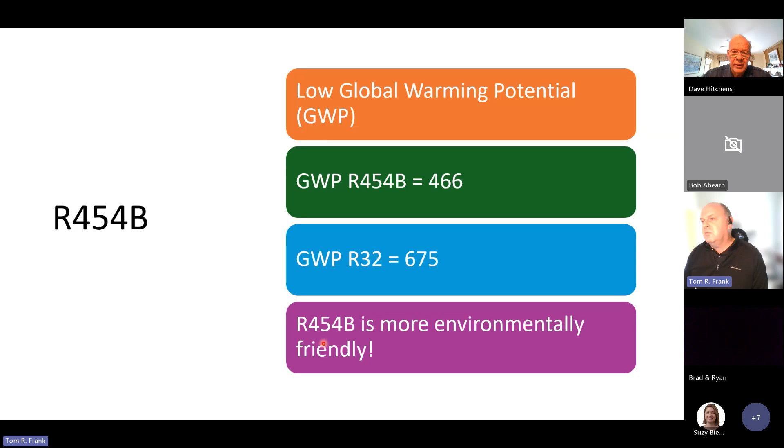Other alternate refrigerants that still conform would be found in most of the ductless manufacturers, like R32, which is 675, kind of squeaking under the radar. So something to think about with 454B is there are a couple different brands, a couple different choices. 454B is more environmentally friendly, with the lower global warming potential.

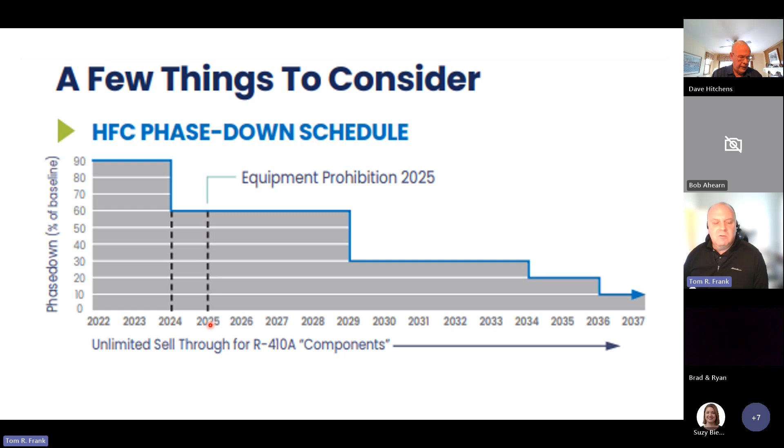This just quickly shows how that phase down works. If you've been through a refrigerant change in the past, I have, you'll know that it's not particularly enjoyable, but we will get through it. This has to do with phase downs over time of the refrigerant itself, when manufacturers can stop or have to stop making equipment, which is really just a few short weeks away. And then there is some sell-through available in the marketplace, which we'll talk about as well.

This slide here is really just talking about that. If you were to think about products available in the marketplace, you could kind of put them into a couple different buckets. There are products, which are finished goods, sealed refrigerant systems from a manufacturer. Those products have a 3-year sell-through.

Systems, which would be various components that get matched together and installed out in the marketplace, have a 1-year sell-through. And then repair components, things that maybe use 410A, may have a longer sell-through if they meet some of the standards put together by our government. And then parts, tools, and testing—you just want to make sure you have the right stuff to work on the equipment using the new refrigerants available today.

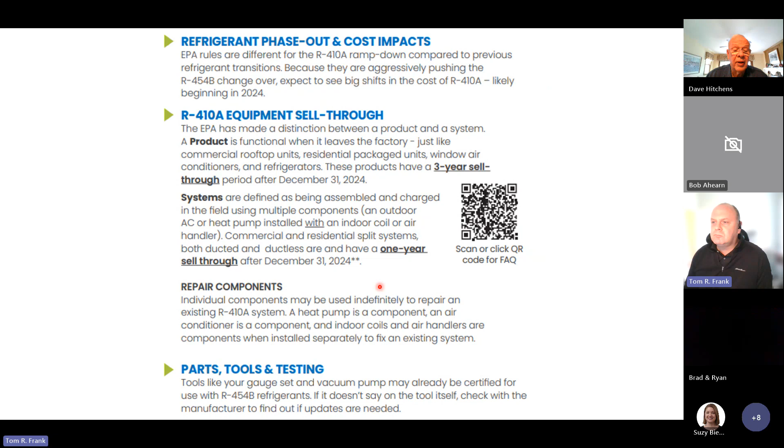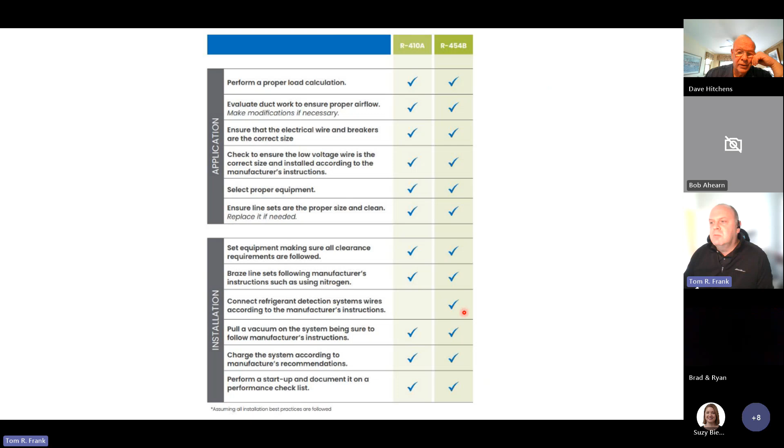This slide here has a bunch of check boxes and different categories. The point of the slide is practices. If you're using good practices today for 410A, really there isn't anything wildly different about 454B, with the exception of this checkbox here, which has to do with refrigerant detection systems that are required on new A2L refrigerants. Everything else really stays the same—you're going to install it the same, select the equipment really the same. Load calculations are important, duct work, charging, everything that you do with the current refrigerant today. There's just a couple other components that are required with the newer refrigerants.

We have a refrigerant detection system control, which is kind of the heart that makes the whole thing work, or the brain. And then we have refrigerant detection sensors.

You can think of these two components when you put them together - they operate kind of like a wet switch. When they detect a particular amount of refrigerant, they will act in a way that shuts down the compressor, runs the fan in the system to dissipate any refrigerant that may be in the airstream until it gets below a particular allowable amount, and then allows the system to work again, unless other sensors within the system say it's not a good idea, like pressure switches.

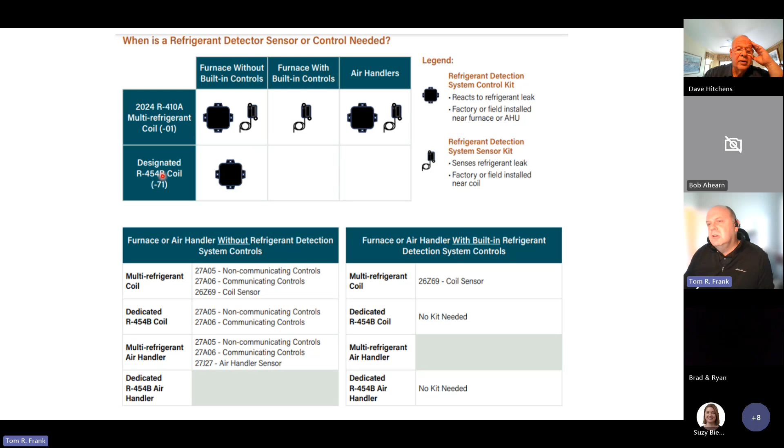So we have sensors, we have controls, and we would also have TXVs. Those are the major components that change as we move into the new A2L refrigerants. You'll see in the nomenclature - we'll get into another slide here - -01, -71. Allied is moving to a bridge system, so some components will be able to be converted to 454B, and others will become dedicated, and we'll talk a little more about that.

Stuff is coming in, stuff we're running out of, and you're neck deep in the middle of it. So if you're hoping that this thing won't happen and will just go away, you will be disappointed, because we're in the midst of it.

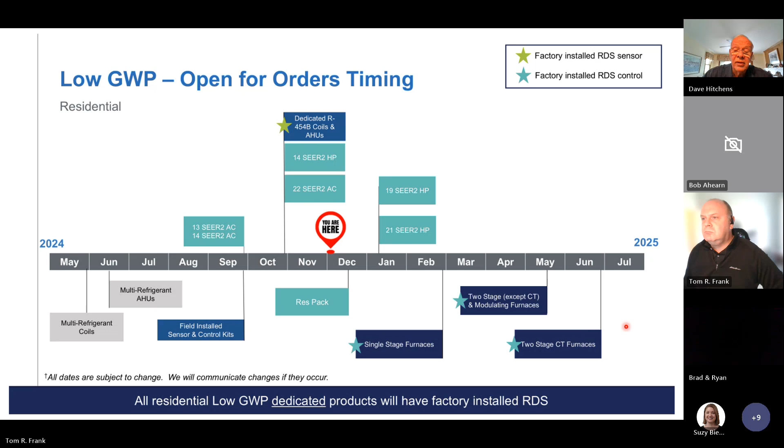We have a tool that we use internally to map out our current inventory of 410A product and what those new products are moving into in the future. I have a roadmap that we'll go over in more detail, but just to let you know, we've developed a lot of our own tools internally to help us keep an eye on what we're running low of, what the replacement is, and whether or not we have enough of it on order.

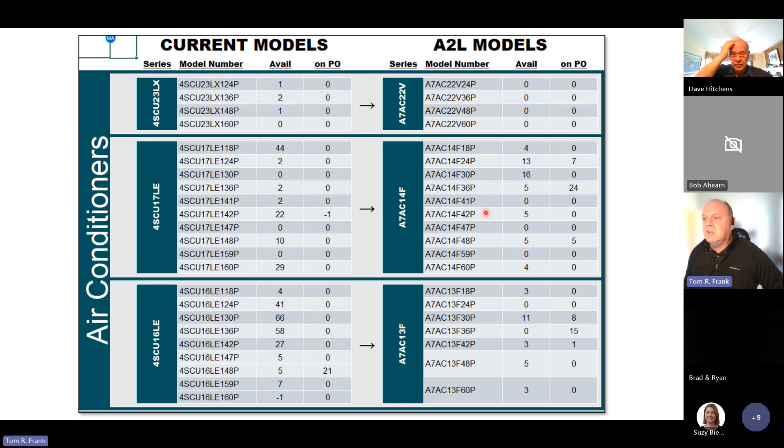We have a really great team of people here at APR Supply. Allied has a great team of people too, but we really have a lot of attention on this subject. It's obviously a very big deal - it's millions of dollars of inventory. We're doing our very best to get it right.

Stocking strategy - we placed our last orders for 410A quite some time ago. The goal, as we were looking at that roadmap and 'You Are Here' map and the timeline, is to plan it so that we have enough of a buffer of product on order to get us past when we think the new stuff is available - roughly about 6 weeks. Allied has been very good about meeting their timeline so far, and it's worked out pretty good.

Flagship brand, AirEase and Armstrong brands - our goal is to move to the 454B as it becomes available. That's how we planned our inventory, not dragging those brands out longer than we necessarily need to.

However, we did choose with Concord, which is the value-driven line, on the entry-level ACs and heat pumps, to hopefully have enough inventory to get us to about June. So if you're someone that really doesn't want to transition until you absolutely have to, know that we have a pretty good amount of inventory of Concord products and matched components that we hope gets us to about the June timeframe.

This transition's a little different because we talked about products, systems and components. That one-year sell-through is not just a ban on us being able to buy and sell it to you, but that's a straight up install ban. So come January 1st of 2026, as an installing contractor, by law you can no longer install 410A systems.

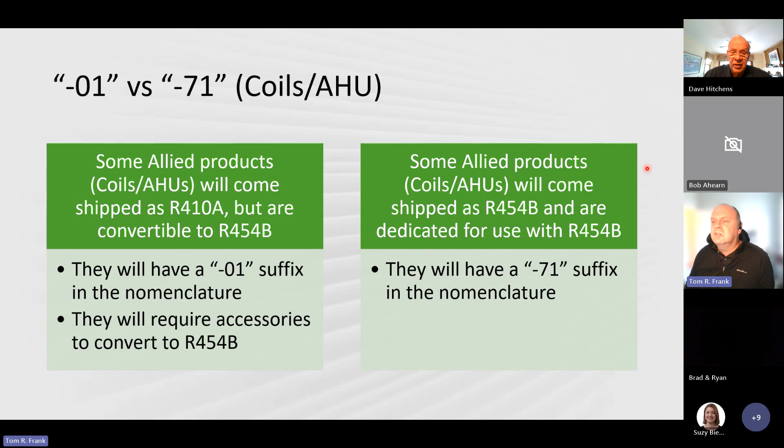Starting with the coil nomenclature here, just so you understand some of the changes to the new products. Starting with coils and air handlers, because the nomenclature is identical between the various brands - the AirEase, Armstrong, Concord all share the same nomenclature for coils. You will see the use of the number 7. That will be our indicator in a lot of the allied products for 454B. Either it's compatible with that, or it is dedicated. In either scenario, the 7 is a good indicator that you're on the right path for a 454B system.

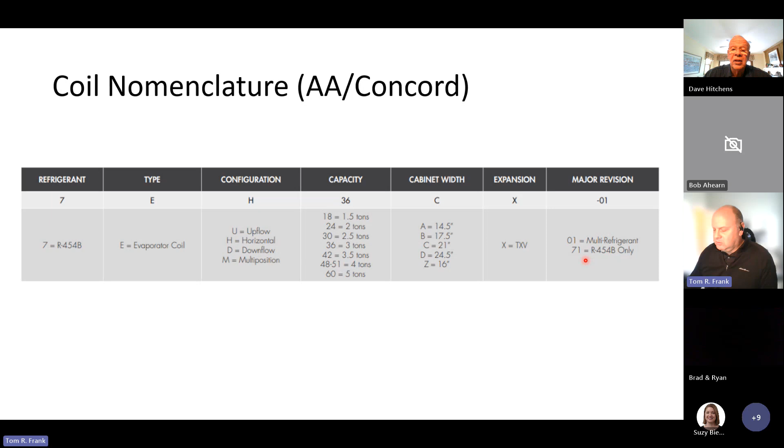7E, that'd be your evaporator coils. Not listed here is C, which would be cased upflow, but there's also upflow coils, horizontal, downflow, and somewhere in the timeline a multi-position is coming back. And then at the tail end, the suffix of 01 and 71, like we just talked about.

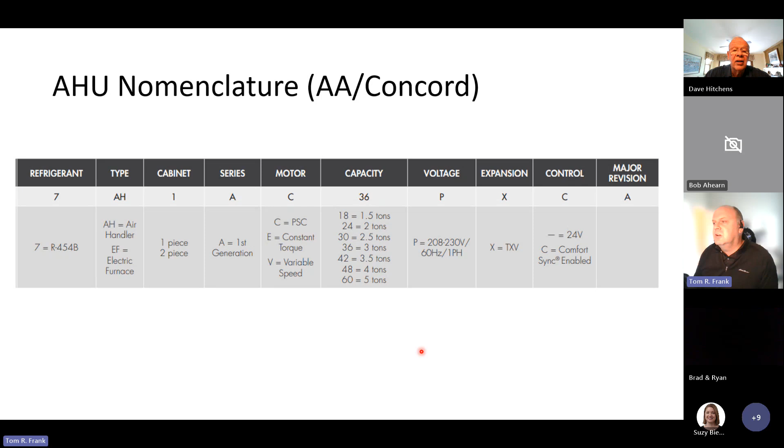Air handler nomenclature, a similar strategy of 7AH. There is an EF, or electric furnace, a modular air handler if you will. Some of the air handlers are single piece, some are 2-piece, so you'll see that in the nomenclature. There will still be options for PSC air handlers, constant torque ECM, as well as variable speed - that remains unchanged. Various tonnages, TXVs, and then somewhere in that suffix you should see either a -01 or a -71, just so you're aware.

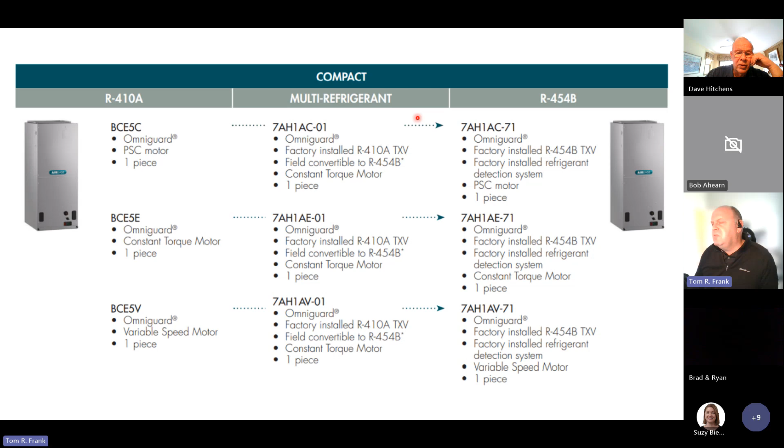Quick roadmap of air handlers. Again, really for the most part, if it existed previously in 410A, that strategy of available products remains unchanged, just with a nomenclature change. Dimensions, even ratings for the most part, are very, very similar.

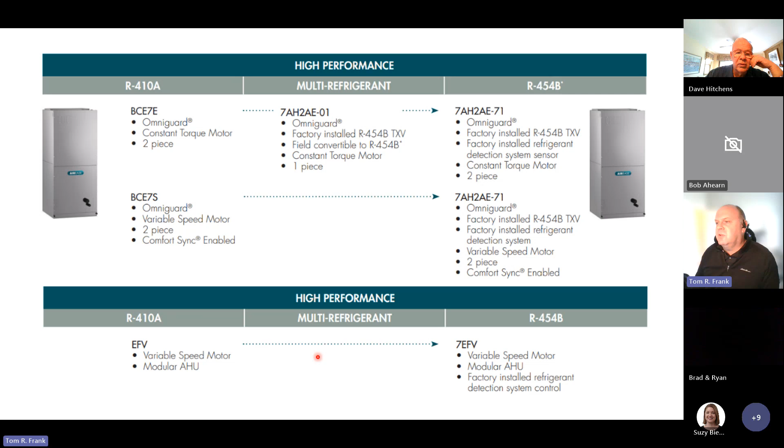These are the higher performance models. These are two-piece - so if you were ever wondering, does Allied make a two-piece air handler? They do, and they will continue to. They don't show a picture of it here, but this EFV, which they call an electric furnace, you could kind of think of that as really the top half of an air handler. We do currently stock that. If you weren't aware, now you are, and that will remain available into the future. Nice for attic installs - you typically match that with a compatible coil, either upflow, horizontal, or multi-position, and away you go.

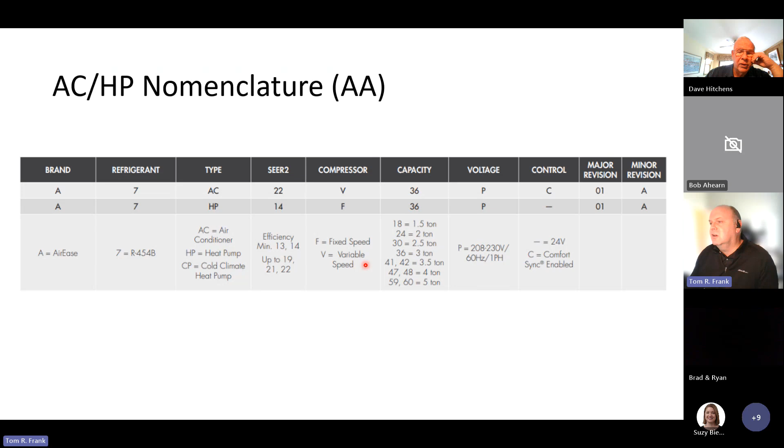This is the flagship brand, AirEase or Armstrong nomenclature. It is the same whether it's AirEase or Armstrong, so if you don't see Armstrong here and that's your brand, just know it's the same nomenclature. Again, you see the use of the number 7 here. We will have a variety of different options: air conditioner, heat pump. There will be a new cold climate heat pump unit available, which is a nice addition. Compressors will be either fixed speed or variable speed. If you remembered multi-stage compressors in the past, you will not see that in the future as I know it, at least right now. It is either single speed or it is an inverter product.

Similar story as far as availability as a roadmap. If it existed before, it exists into the future. So we will have a full modulating outdoor unit, a step-down modulating unit, and there will also be single-stage stuff.

A takeaway here in the nomenclature strategy is that Allied is moving from an up-to strategy, where units used to get up to 17 SEER, up to 16 SEER, and the nomenclature would reflect a 17 or 16. They are now changing that strategy, which was confusing for many, to go with really what it is out of the box. So you'll see what used to be a 17 is now a 14, and what used to be a 16 is now a 13. I've looked at ratings, and know that it didn't become a less efficient unit. It's strictly a marketing nomenclature strategy change. People thought we were overselling them product when they wanted something entry level.

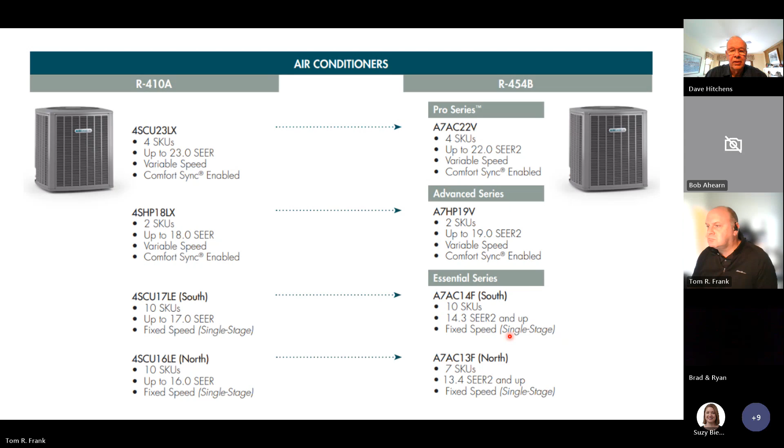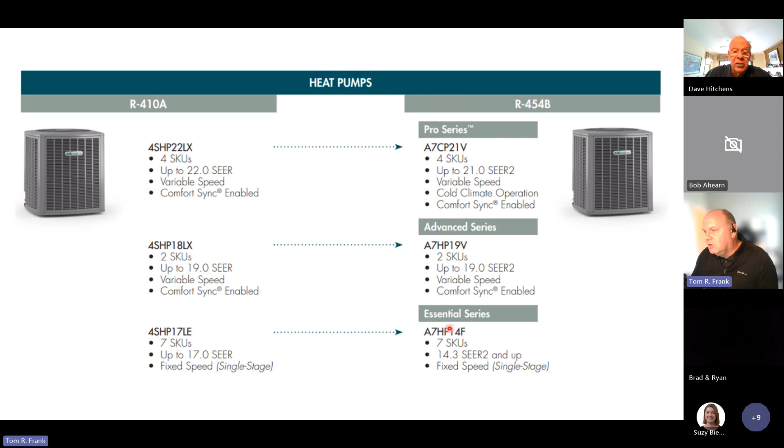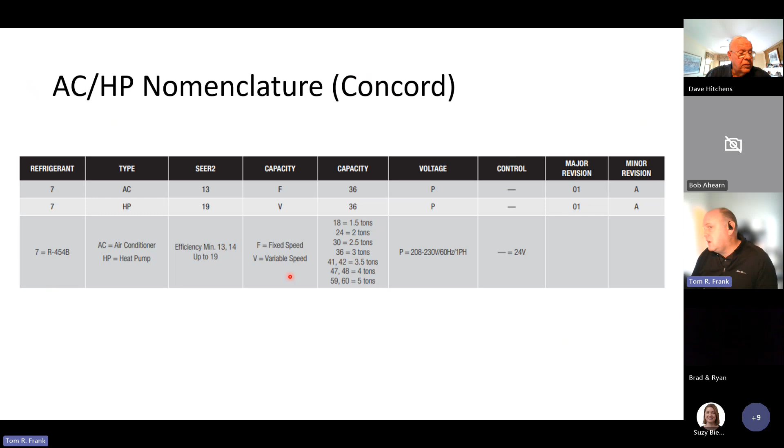Concord, very similar nomenclature strategy there as well. You'll see that it'll start with a 7 here to indicate the 454B. There will be single stage options and also inverter. Nice that you have an inverter option in the value line.

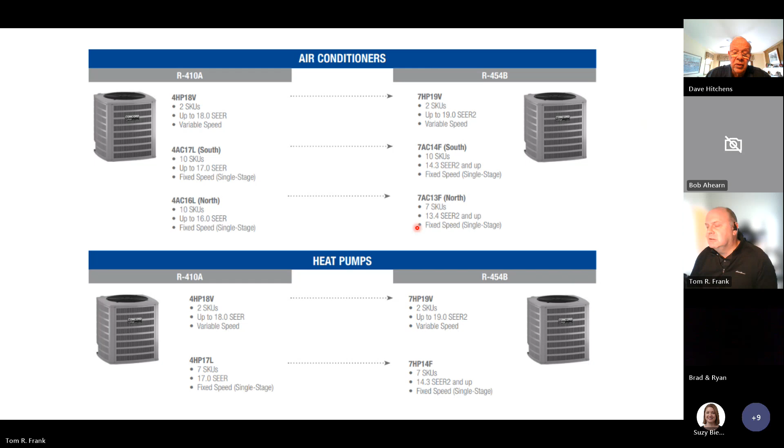So air conditioners, you'll see that's really an inverter heat pump. They don't make a 2-stage anymore. You will see single stage product for our southern markets or for higher efficiency matchups, as well as an entry level. Same story with the model nomenclature to reflect the standard efficiencies. Same thing with heat pumps.

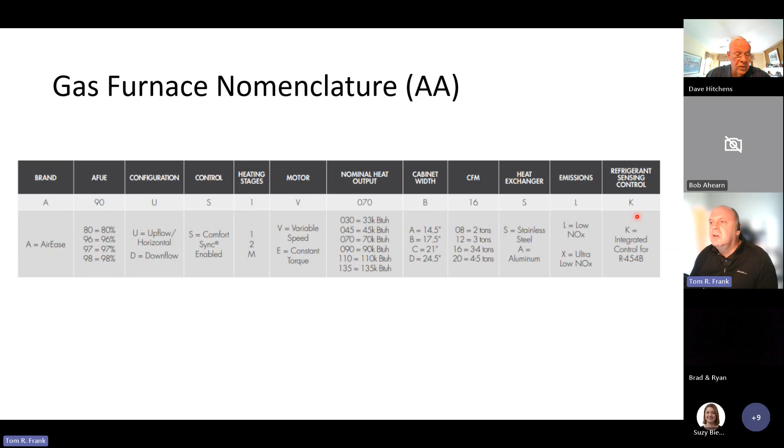Gas furnaces, major takeaways here that I'm just going to point out. This doesn't happen until maybe Q2 of 2025, if I had to guess when we start to see it. The big takeaway is you'll see the K at the end of the nomenclature. Really, none of the options for the furnaces are changing that I know of. It's strictly just a change into that integrated control to be able to receive the sensors.

It existed before, it exists moving into the future. You probably started to see this already. Some of the old 97s are now 98s. We have a really, really wonderful lineup of gas furnaces. We probably have more tax credit qualifying 97% plus gas furnaces than any other manufacturer on the market today.

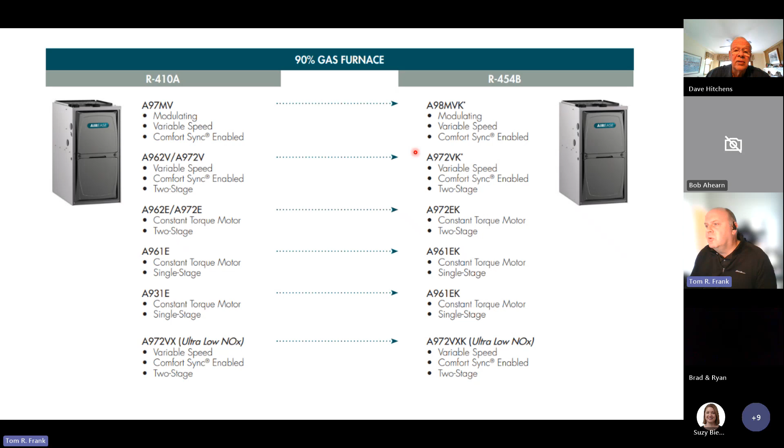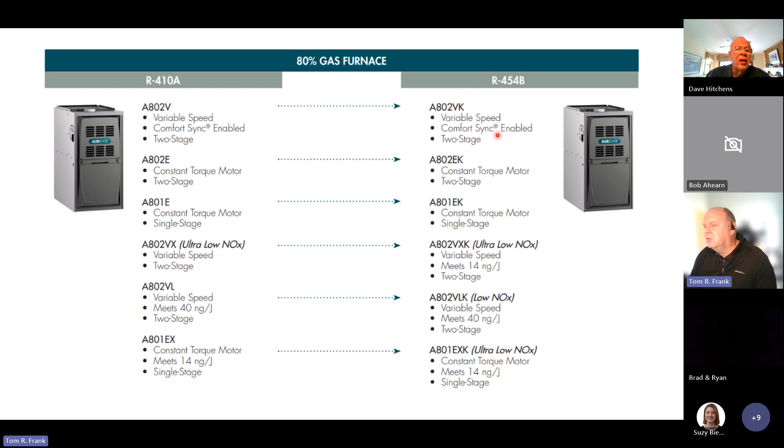Some of those are 2-stage standard ECM, like this guy, and some are true variable speed. And then we have an actual modulating gas furnace as well. Great products. Same on the 80%, the non-condensing side. Low NOx, we don't really stock. That's really more of a California thing.

Concord, I spelled that wrong, Concord. Same sort of nomenclature. You'll see that K. You're going to sneak that K in there at the tail end of the model number. That's your indicator.

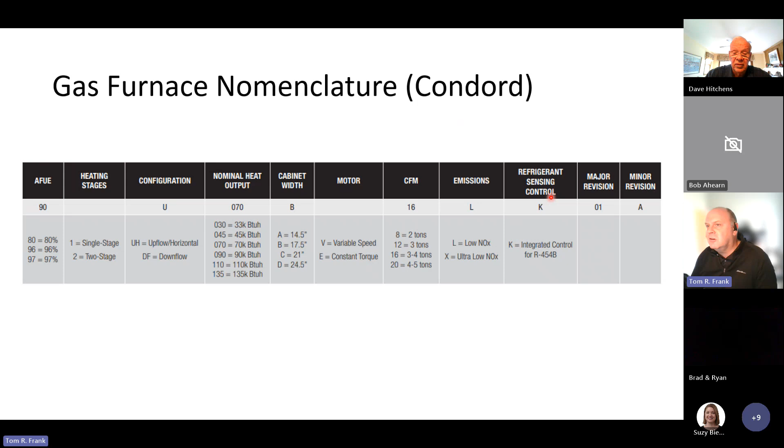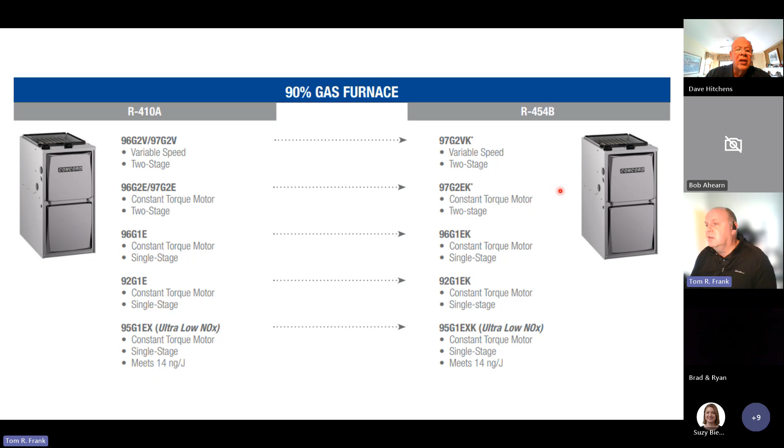Same strategies. What was is still exists today. But even in the Concord value line, you'd see that we have two 97% gas furnace options. One is variable speed, and the other is constant torque ECM. Really nice having those options, and we stock them. 80%, similar strategy.

Electric heat packs - we have our own charts and data internally to help us navigate this. Know that the electric heats have changed to conform to new A2L standards and regulatory changes. You don't need to remember all these model numbers, but you might see some you used to know. The ECBA 25s are now ECB 45s.

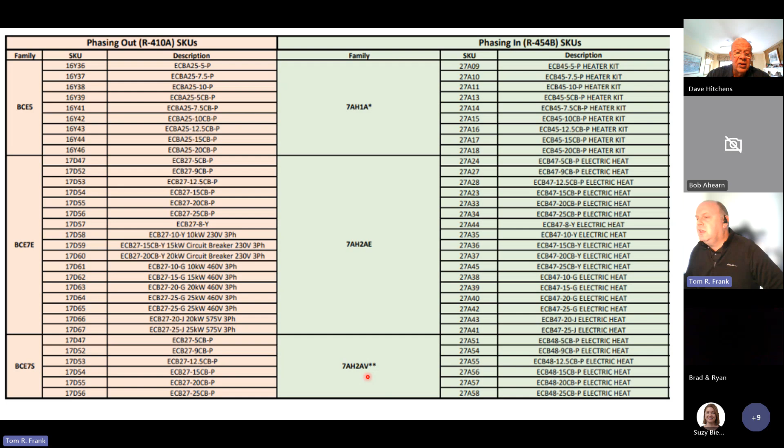They are backwards compatible, so really no need to worry about that. Same with if you're selling any of the current two-piece air handlers, those models are backwards compatible. There is really only one outlier: if you're somebody that sells the old BCE 7S, that's a communicating capable air handler. You're selling communicating systems, and as we move to the new communicating capable air handlers that are two-piece, that air handler requires a very specific electric heat kit moving forward.

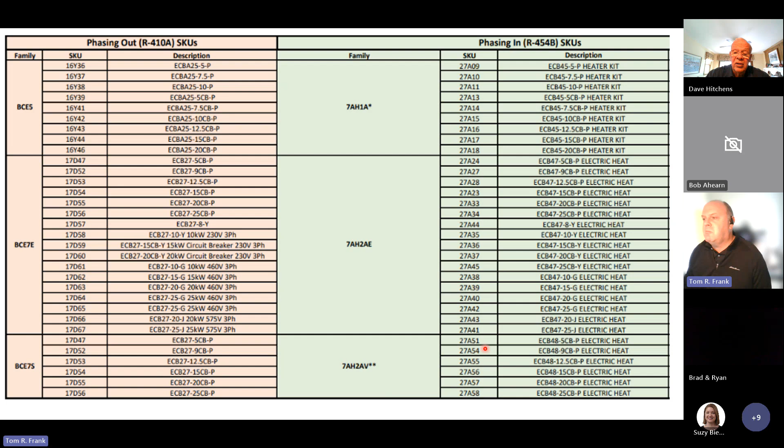If you're an installing contractor, you don't need to memorize that. Know that we have some tools internally to help us with that, but that is a change that happened. Takeaways on electric heats: like I mentioned, the new ones are backwards compatible for the most part. The only one that's the outlier is the BCE 7S - those are specific electric heat kits.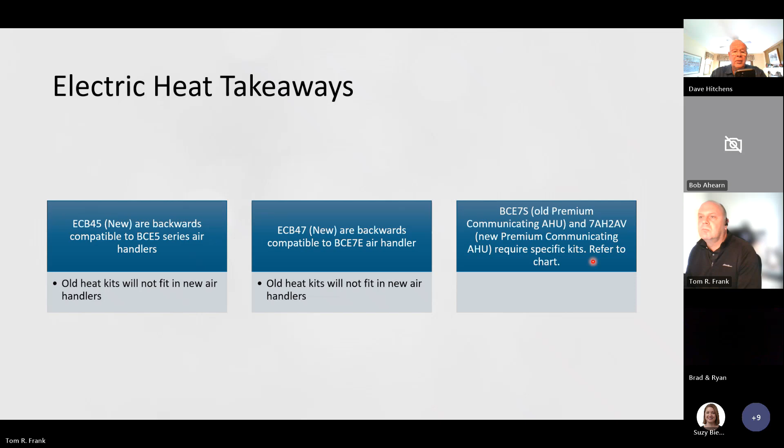This chart again just shows you different scenarios, and we'll go over one of when you might need to add the sensor and the control. A great example would be you buy a condenser and a coil and a current gas furnace today. Right now we're shipping the O1 coils. You have the 454B condensing unit - maybe we ran out of 410A and we're subbing with that. Well, you would need that coil, the O1 coil.

You would need the sensor. You would need this control. And then you would also need to change the TXV as well - so 3 components. As we move forward and some of the coils become the Dash 71s and the furnaces and air handlers are the Dash 71s, there's nothing additional you need to see in this box, nothing additional we really need. That'll, in the future, this really just bridges us till all that stuff becomes available.

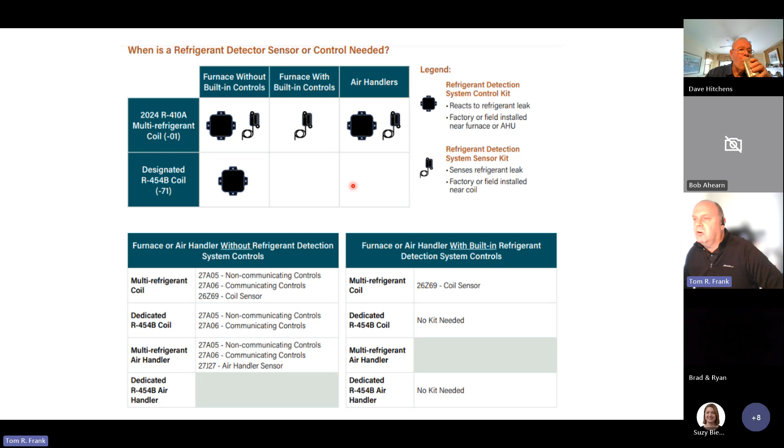These are charts that we use here - flow charts to help us understand: hey, I'm doing a new air handler installation, great, what is the application here? Is it a multi-refrigerant? Oh yeah, it's an O1, that's what we're currently shipping. Well, how are you using it - with 410A or 454B? Well, it's going to be with a 454B condensing unit. Okay, you're going to need the following things here, plus a TXV kit. I'll show you how we manage that internally, but just know that those are accessories that are needed for now.

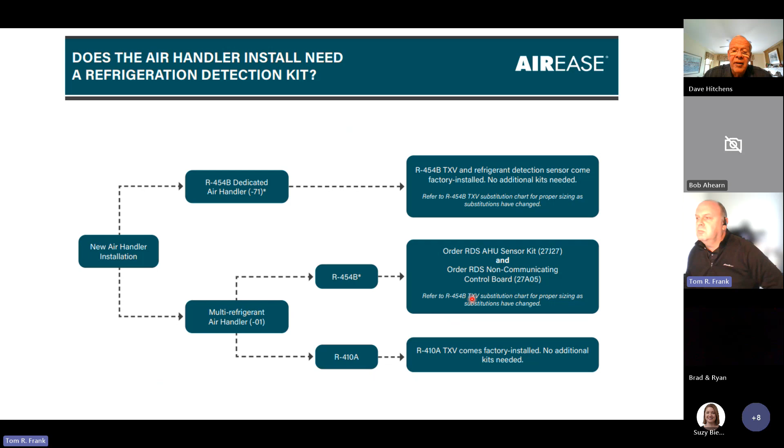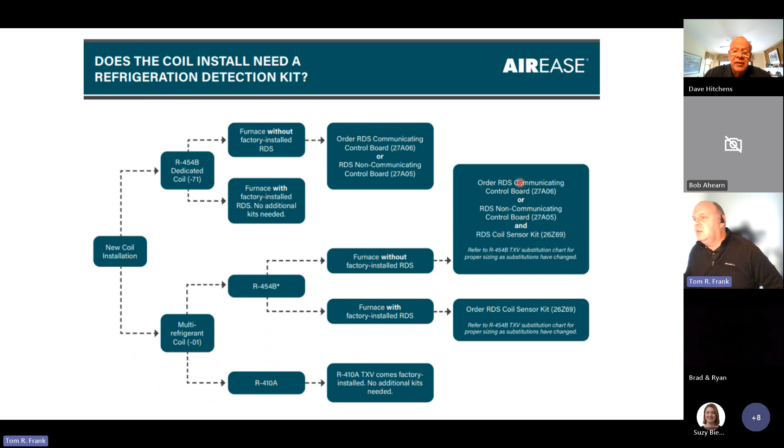Same thing with the coil, similar flow chart - hey, here's the O1 coil, how's it being used? If it's 410A, I don't need to do anything different. If it's 454B, I just have to understand, is it a new furnace? Is it an older furnace? Let's say it's the current furnace - okay, I need all these different things here.

These charts are available on request. These are the TXV part numbers - very simple, 3 different TXVs depending on your tonnage of coil.

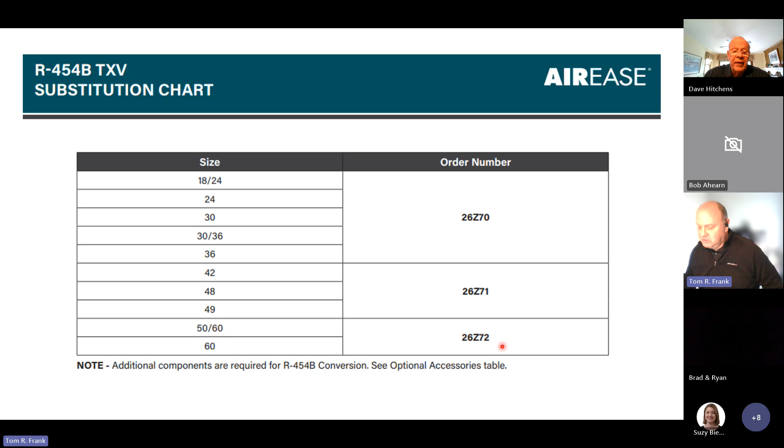This is a real world example. I picked this model because we're starting to run low on some of the AirEase 410A outdoors. This is the new model nomenclature for the 454B. I would likely be matching it with an O1 coil. I would need the RDSC, the refrigerant detection sensor control field kit. It's going on a non-communicating furnace, so this would be the guy that I need. I would need the coil sensor right here to mount in the coil, and then I would also need this TXV kit to make it all work.

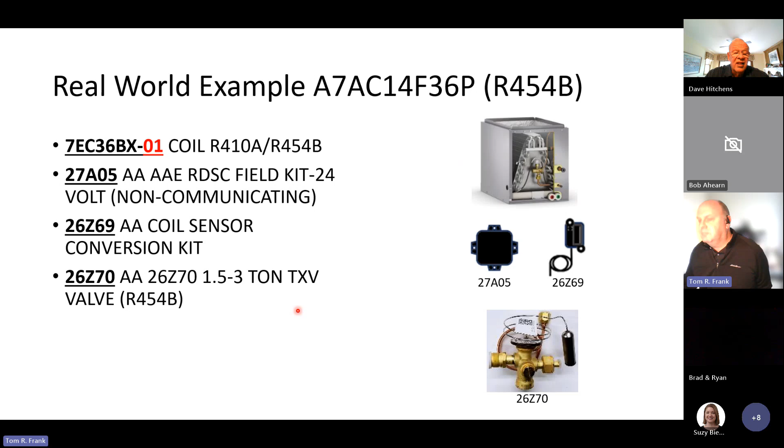This is kind of what it looks like if you're looking at it in the field. I have a condensing unit, and the wires go back to my control, probably mounted on the coil or by the furnace. My thermostat comes into the control, the sensor comes into the control, and then my furnace wiring also comes back to the control. It literally becomes the new interim brain of the system - that tells everything what to do.

There are LEDs on the control itself that will show you whether it's operating normally, whether it has gone through a mitigation. So even if you came back to a job after the fact and you saw that the light was blue, you would know that something happened, an event happened. Now it might be running normally, but you would know that it actually went through a mitigation at some point.

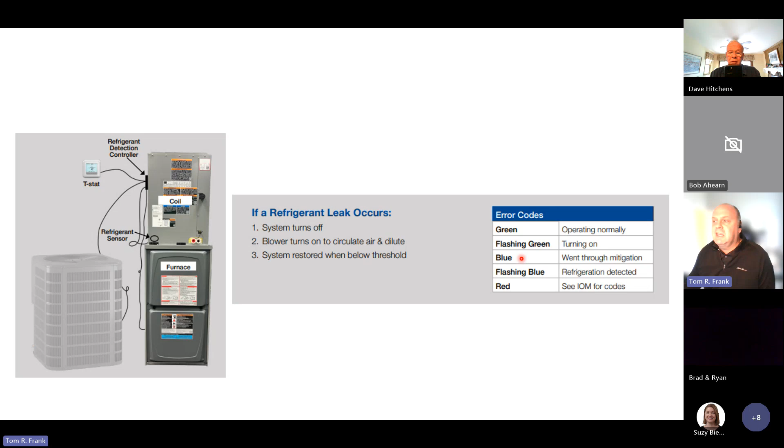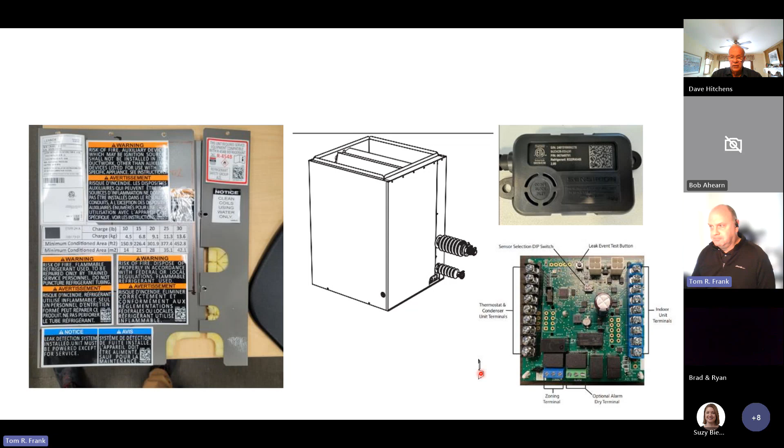A quick plug here for our A3 communicating control - really no changes to that, just an awareness slide that we have many systems within the AirEase product family or Armstrong that are communicating capable. They make a very nice communicating control, very plug and play, great user interface, high end, controls temperature and humidity, really becomes the window into the system for how it's operating. It's Wi-Fi. If you like high-end types of systems, just know that they make a very nice communicating control called the A3 communicating control. That remains unchanged regardless of the refrigerant change.

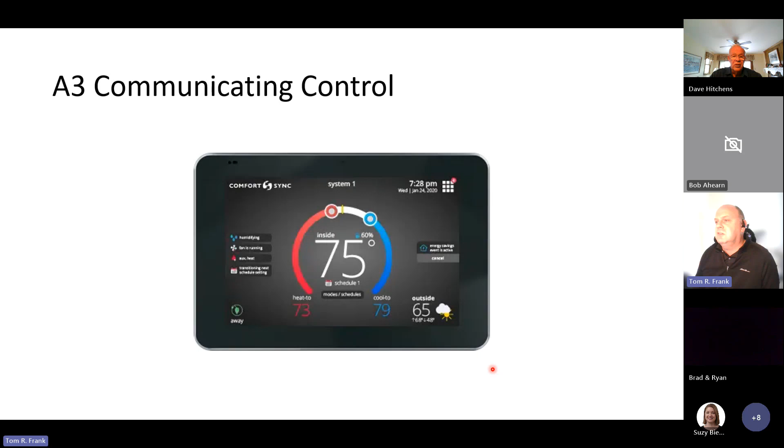Some other changes to the product lineup here, AirEase and Concord - you're going to see longer stub outs on the service valves. There still will be bell ends, but they will be long enough that if you want to cut that bell end off to press, you're not really sweating bullets hoping there's enough meat on the end for pressing. There's plenty of room on there, and that's a good thing, I think.

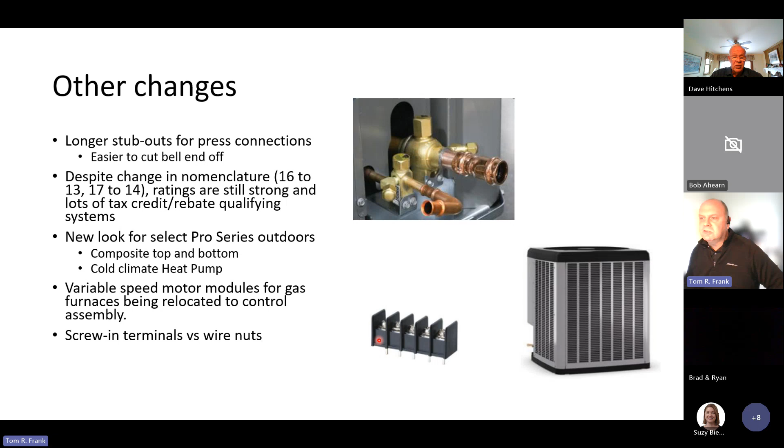Shifting gears, MagicPak, part of the Allied family. These are just a few slides. If you didn't know, we sell MagicPak or through-the-wall package units. You do now. The M series is kind of more of the newer style, more options available. The V series has been around for quite some time.

You will see on some of the products may have mitigation controls as an option. If you are using less than 4.1 pounds of refrigerant, I believe the manufacturer is not required to include the mitigation control. So units that have small refrigerant circuits, some ductless systems, may not require the use of that mitigation control. You may not see it. Geothermal is another one that lives in that world.

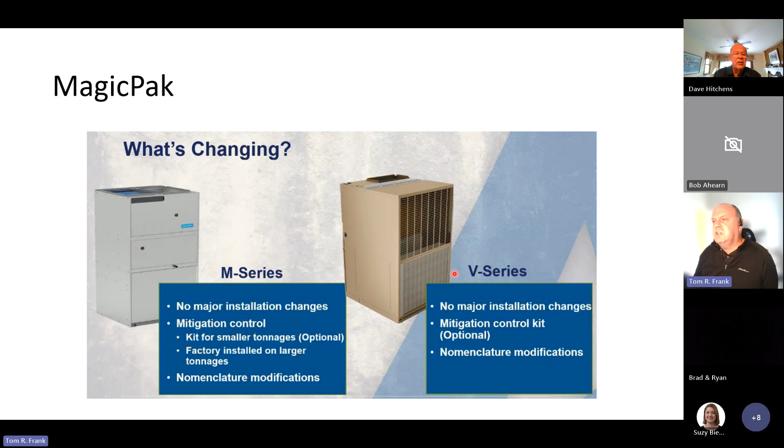Very little change to the product family. You can see here, this is where we are with MagicPak products. We're right on the cusp, if not in the middle of that change. The manufacturer is moving over. Since that is considered a product with a sealed circuit, that has a little bit more of a sell-through period there. But we're switching over as we speak.

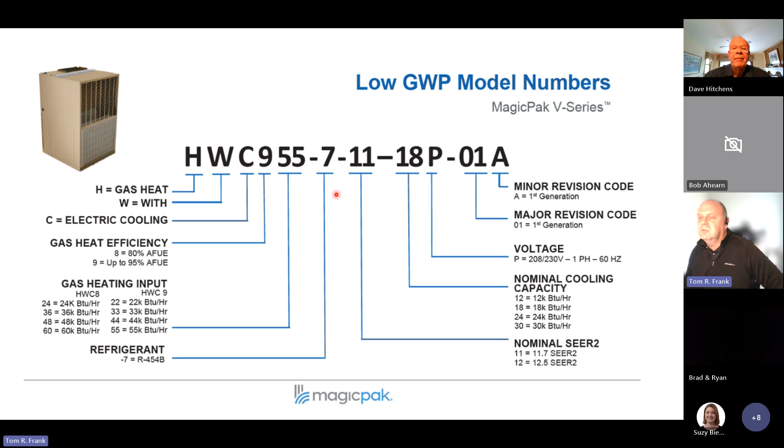Big takeaways here in the nomenclature change, if you're familiar with the MagicPak product, is the 7 that you're going to see in the middle of the nomenclature reflecting the refrigerant change. Other than that, not a whole lot of change in their nomenclature. It'd be very similar looking, you will just see that 7. Again, on the M series, you will see the 7 integrated into the model nomenclature.

This is really just about that transition rule and products versus systems versus components and how it all plays out. Even though a condensing unit might be considered a component, there are some rules and regulations about what minimum efficiency it has to require as a component for a manufacturer to continue to sell it. It basically, it's going to go away. You're not going to be able to buy a condensing unit really as a component. The manufacturers cannot make them anymore. So as long as you can find them in the marketplace, good luck to you. But expect a limited supply, just like what happened with R22.

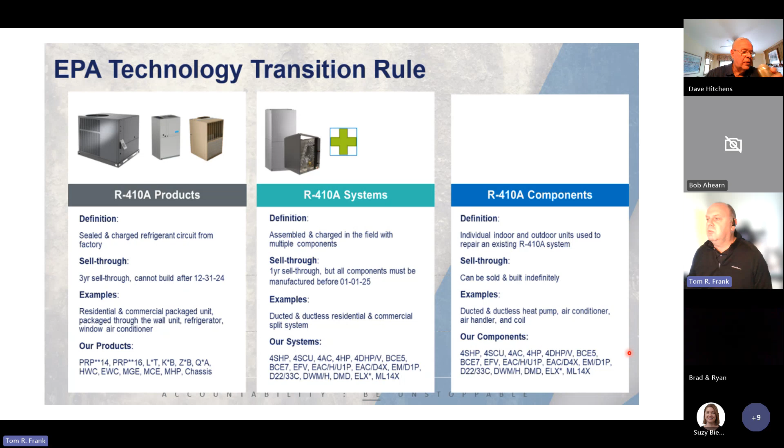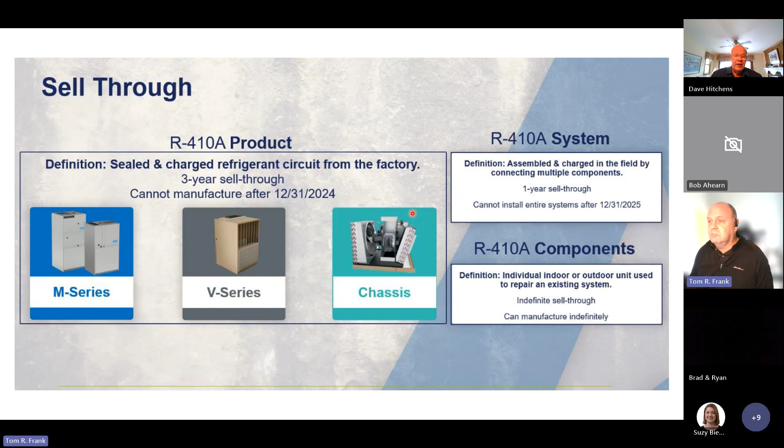More on that same subject with regards to MagicPak. Again, that's considered a product, a sealed product from the manufacturer, 3-year sell-through, if you can find it. The manufacturers have to stop making it, but the hard part will be finding it. Chassis, which are that sealed refrigerant circuit, also fall into that bucket as well. Again, really just will you be able to find it? Already went over nomenclature.

Timeline we already talked about. Quick update on tax credit 25C, which affects most of the residential products that we sell.

What's not changing is this program is still good through 2032. Homeowners can still get up to $2,000 for qualifying heat pumps, $600 for furnaces, and $600 for AC. Gas furnaces still have a requirement of 97%. That is unchanged. What is changing is the performance level or the ratings required to hit those standards.

Another change: if you live somewhere very close to the border of North and South—in our market, Pennsylvania is considered North, Delaware and Maryland are considered South—that reference to North and South goes away. You will see a new reference called Path A and Path B, which works in a similar manner. If you have a system with a higher HSPF, they will allow a little bit lower EER, which is a cooling requirement. If you have a higher EER, they will allow a little lower HSPF.

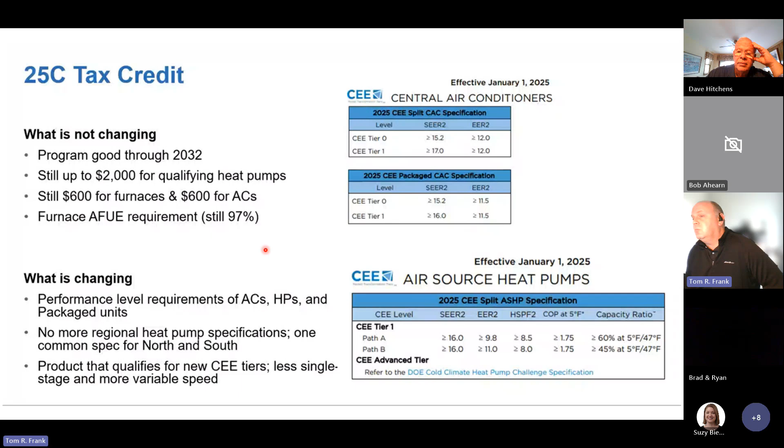Again, the furnace requirement of 97% is not changing, and in the Allied family you have a very long list of products that qualify for that. That's a great position. You might find yourself not even trying to get to the air conditioning standard and just focusing on gas furnaces, and that's not a bad thing. We hope you sell more heat pumps too. Hybrid systems—sell more hybrids.

That gets to the end of my slideshow. I'd love to open it up for questions, going to stop sharing here and see if there's any questions in the chat. If you have a question you'd like to ask, you can either raise your hand, add it to the chat, or unmute yourself if you're brave enough to talk amongst the crowd here.

Anybody got any questions? Comments? Any lucky numbers that want to play in the lottery tonight? Seven, the number seven.

Wow, we are done a little early, which isn't a bad thing.